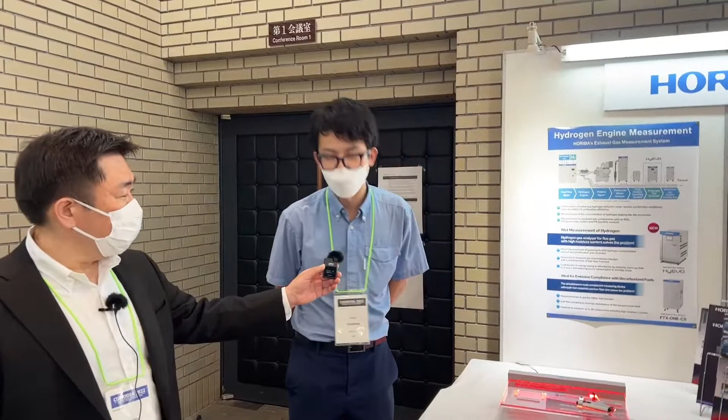Hello everyone, hi everyone. I'm Yoshioka from Horiba Limited. I'm in charge of FTIR measurement systems and hydrogen analyzers. Today I'd like to introduce mainly two topics.

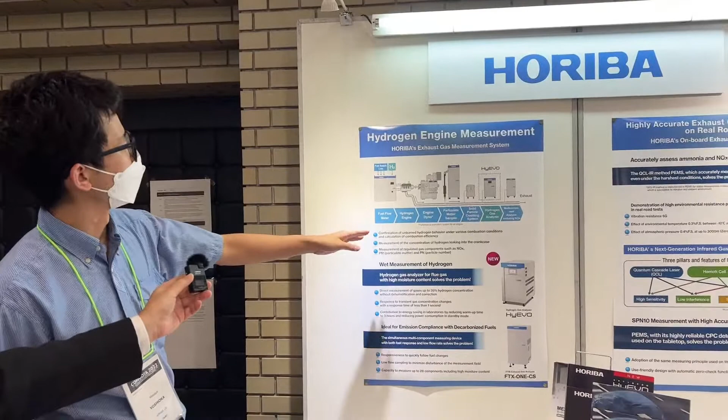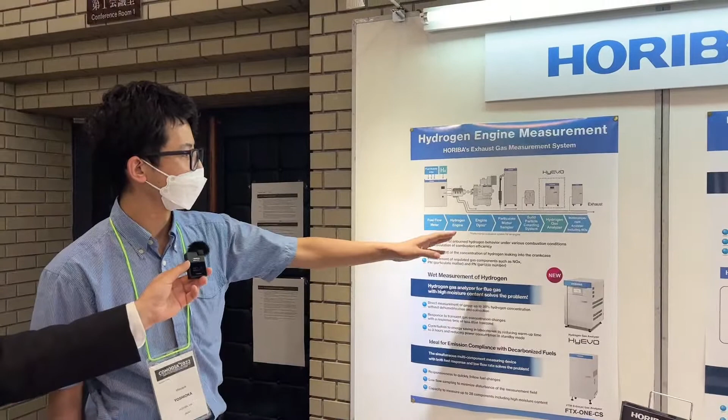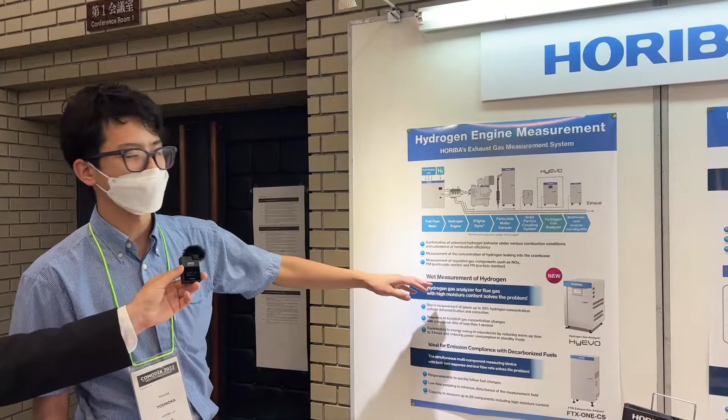One is the hydrogen engine measurement system. Here is a representative schematic. As you know, we need a fuel flow meter, the hydrogen engine itself, and an engine dyno, which measures the performance evaluation of the engine. We also need to measure particulate matter and particle number using these analyzers.

Mostly we need to focus on the hydrogen, so we just released a new hydrogen analyzer called HyEVO. The last one is we also need to measure multi-components including NOx. Today I would like to mainly focus on the new hydrogen analyzer.

This feature is, one, this hydrogen analyzer can measure hydrogen with high moisture content, up to 35% of H2O, due to new technologies. In this case, maximum 35% of water may be contained in the exhaust gas. In such severe conditions, we can measure hydrogen accurately.

The second feature is this HyEVO can measure hydrogen with high response time, less than 1 second, and we achieved that. The last one is we also contribute to saving the laboratory's energy by reducing the warm-up time. The previous one was more than 10 hours, but we reduced the warm-up time to 3 hours in this new system.

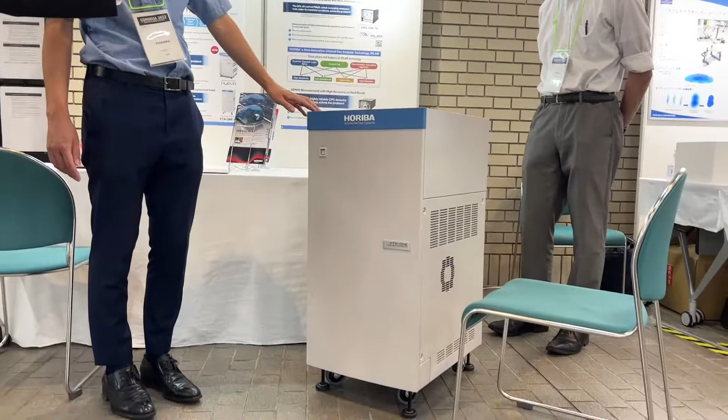The next topic is the FTIR exhaust gas analyzer, which we call FTX-ONE-CS. Here is the real analyzer schematic. We achieved half the size of the previous FTIR, so we can easily move it from one test cell to the next. Here is a feature.

This FTX-ONE can also measure multi-components, up to 28 components, with a high moisture amount, up to 40% water. This can also measure these components with high response time.

We also achieved a very low sample flow rate, 3.5 liters per minute. This contributes to the system especially for very small engine systems, where we need to minimize the disturbance of the measurement field. So this will be one solution, I think.

The next topic is the PEMS system, the on-road system. Thank you very much. So the next presenter is Kitahara-san, who will introduce the PEMS.

My name is Takahiro Kitahara. I'm in charge of the particle measurement system. I will introduce the real driving emission measurement system called PEMS.

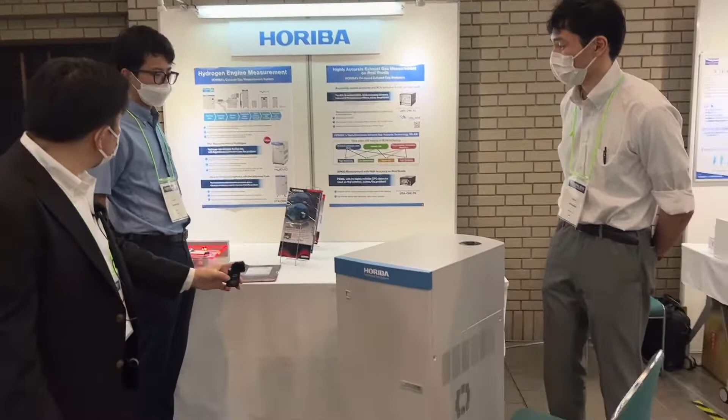I'm very interested in this hydrogen measurement system. What is the size of the measurement system? Is it almost the same? This hydrogen analyzer is very similar to this size. And the FTIR is also a very small one.

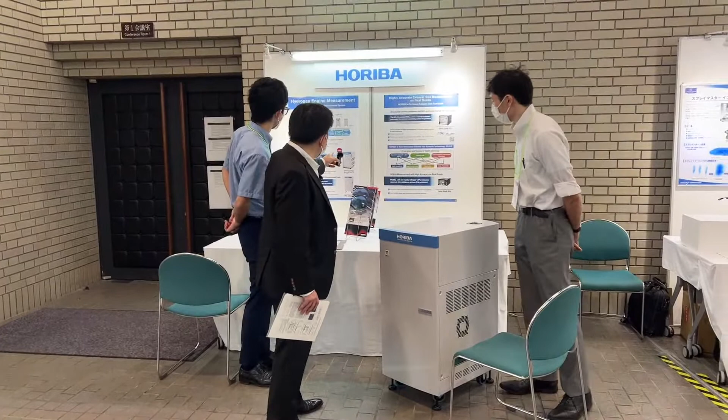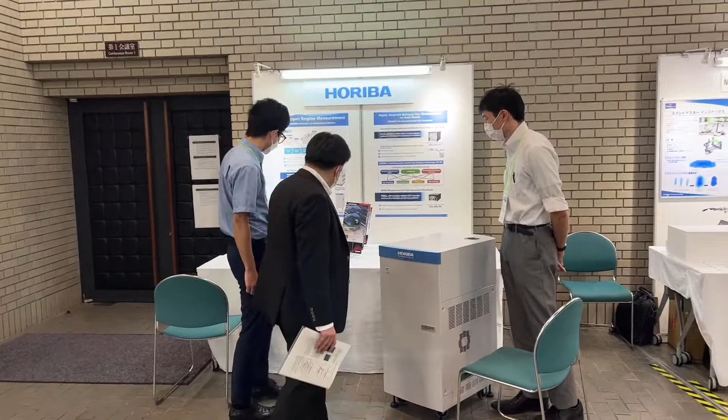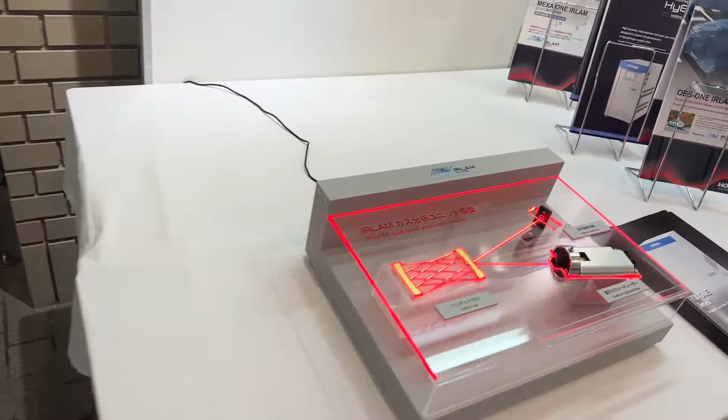Yes, simple schematic. We made this laser by ourselves. You also constructed the QC laser? Yes, by designing the chip things, we can change the wave numbers. Okay, very interesting.

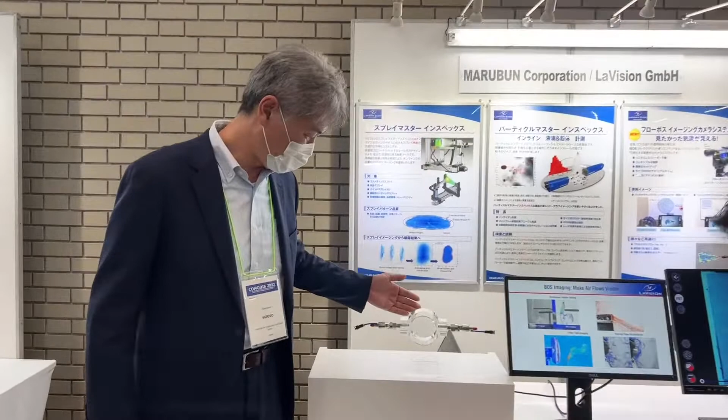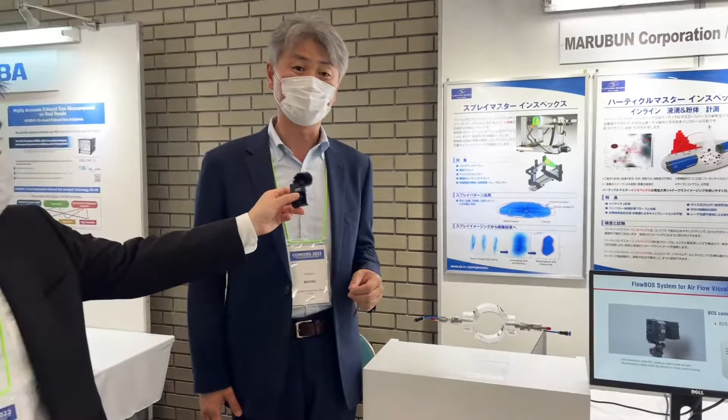This is one system example, for a glass engine cylinder. Laser or light comes in, and it can measure, for example, fuel or temperature or some water, with really high speed measurement, like 32 kilohertz or something. So it's really good for applications measuring fast phenomena.

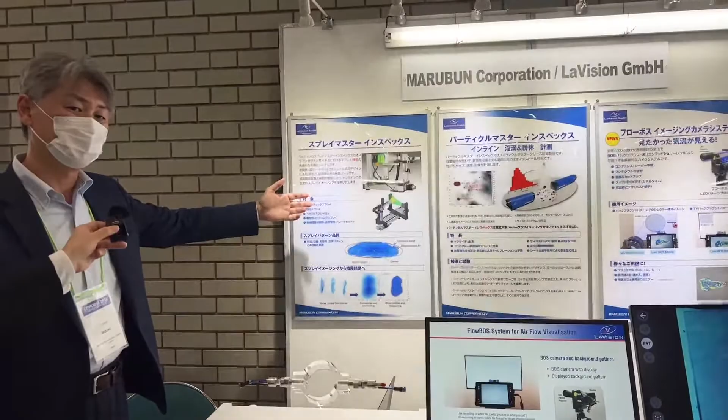Okay, next this slide for the poster is the SprayMaster Inspex system. This is a measurement for spray geometry, so for example, fuel injection or something for quality control - it's also good for this system.

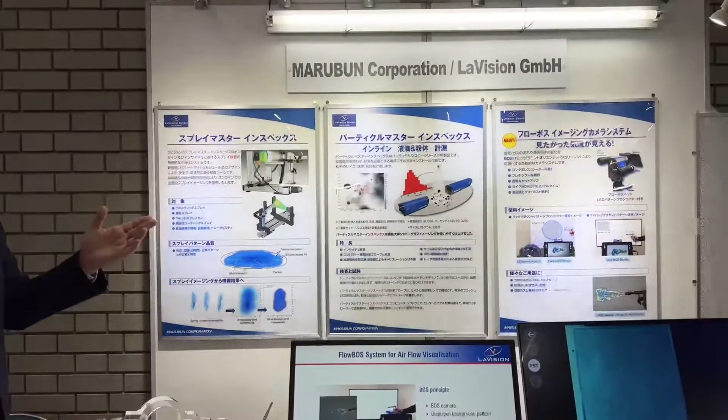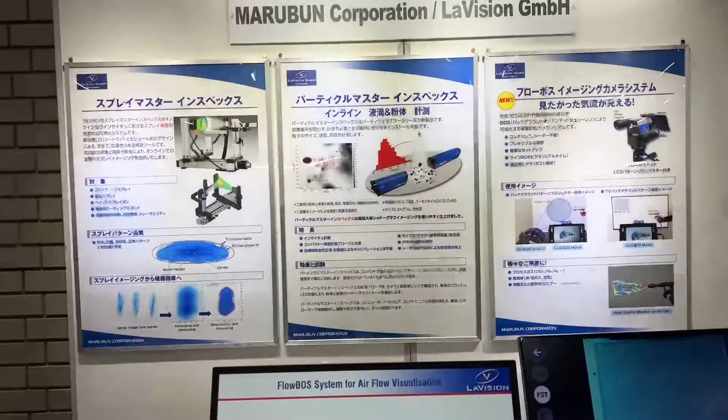And the next one, this is ParticleMaster Inspex, based on the shadowgraphy technique, which can measure the distribution of particle size. This inline system is also available for use in spray dryers or in production areas, so it can cover a huge market range from R&D to production.

Thank you very much, Mizuno-san, for introducing. My name is Thomas Berg, I'm the CEO of LaVision GmbH in Germany. We are located there, and we are developing imaging technology for fluid measurements, and are represented here by Marubun Corporation.

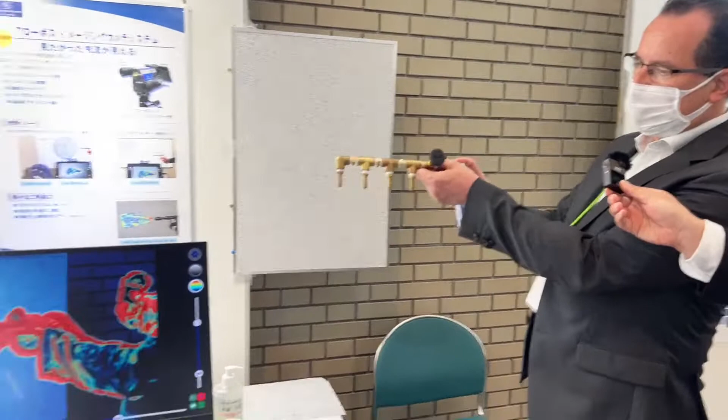I'd like to introduce our latest product, the FlowBOS camera, which is intended to visualize gas flows. This is the camera here, pointing to a background pattern, and if I introduce a gas flow, which I now simulate here, the camera itself can make this gas flow visible. We see different applications in this, especially in the field of hydrogen combustion in the near future, because this way is the only one where you can make hydrogen visible.

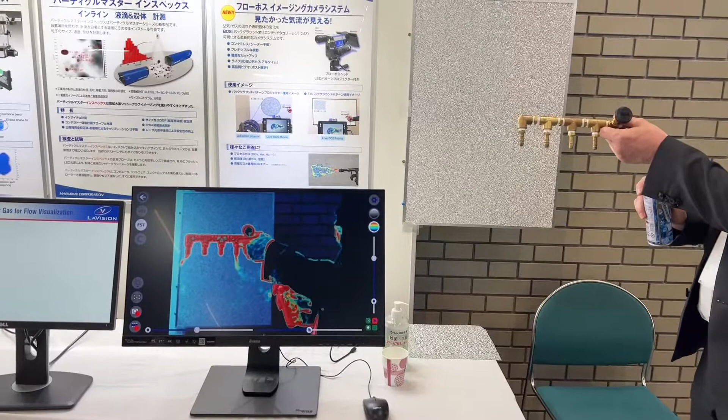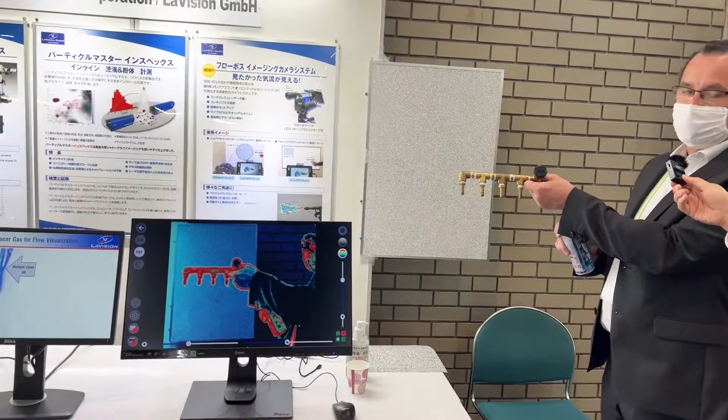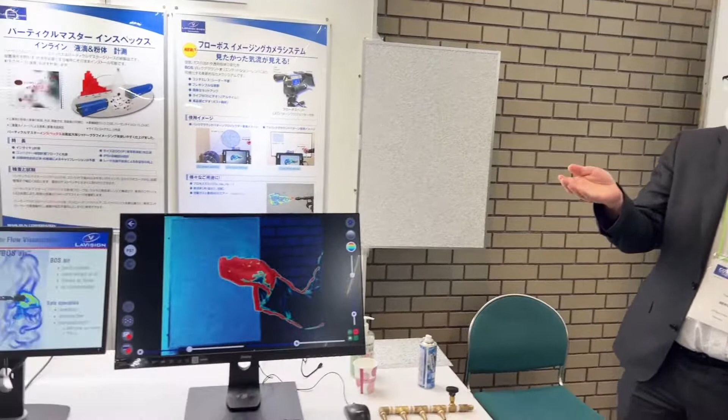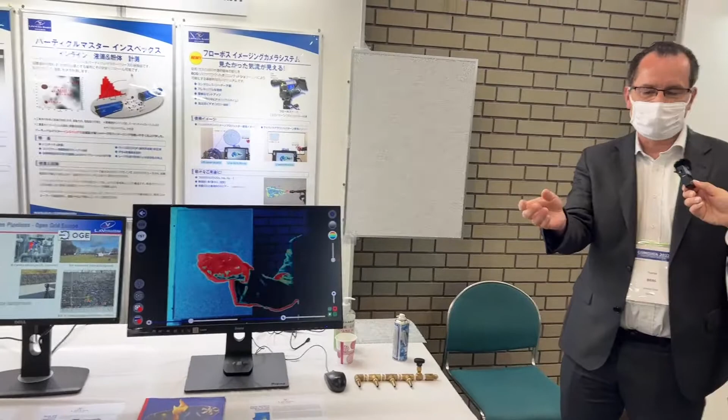Especially distribution of hydrogen, or looking into hydrogen engines or gas turbines, will work like this. The camera itself is very sensitive, so it is also possible to visualize heat - if I hold my hand in here, you still see the heat schlieren from my hand moving up. We use this also for heat transfer phenomena, and there have been research investigations for the spreading of COVID with a mask and so on. So it's a very universal way, and it's easily applicable like a video camera.

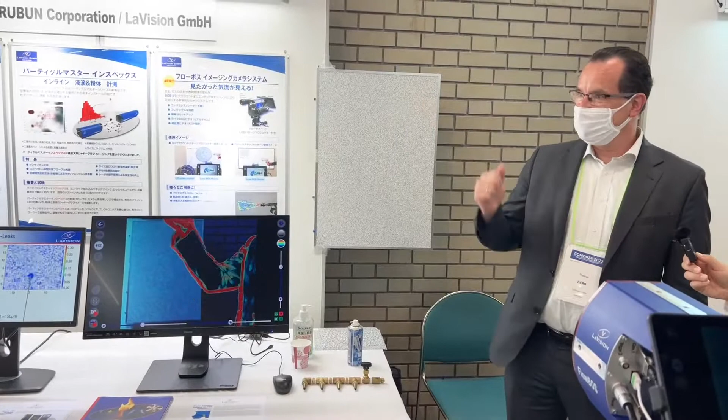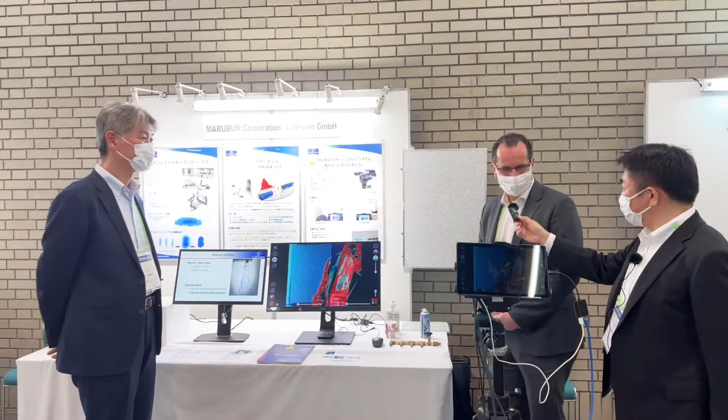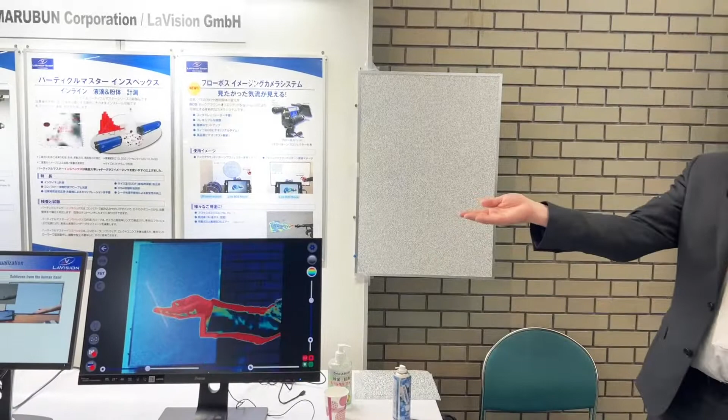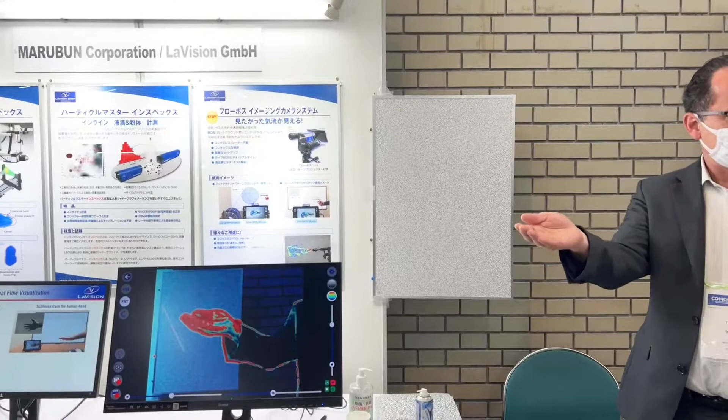It's very interesting, so I have one question. What is the mechanism of the measurement system? This is called background-oriented Schlieren. Schlieren is a measurement technique known with classical mirrors. It's like when you look over a warm street and see the light flickering around - we use this flicker and visualize it from this pattern. The camera looks at this pattern, and if you look over the street you see this motion. If I move my hand like this, your eye does not see anything, but the camera is so sensitive it sees the slightest motion and makes an image out of it. For instance, with hydrogen, the refractive index change of hydrogen is used to visualize it. So this is the technique behind it.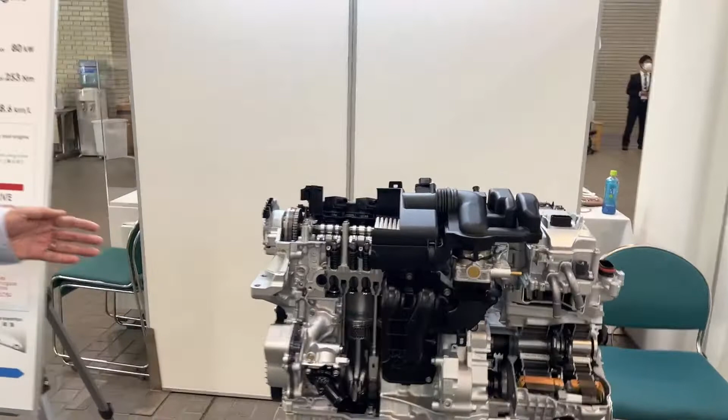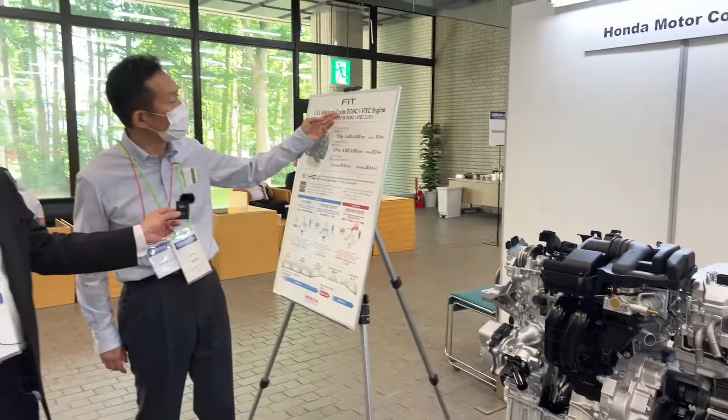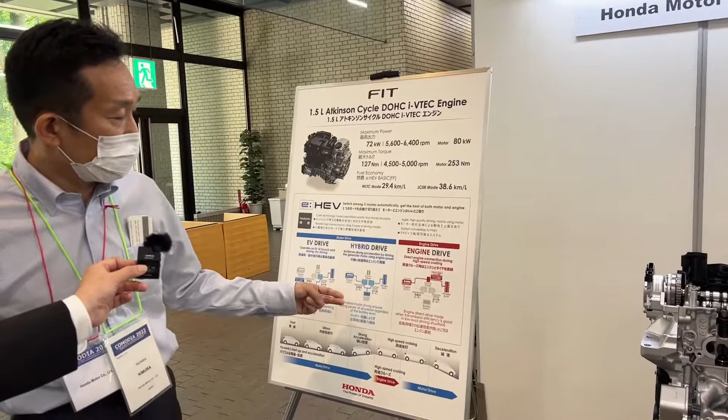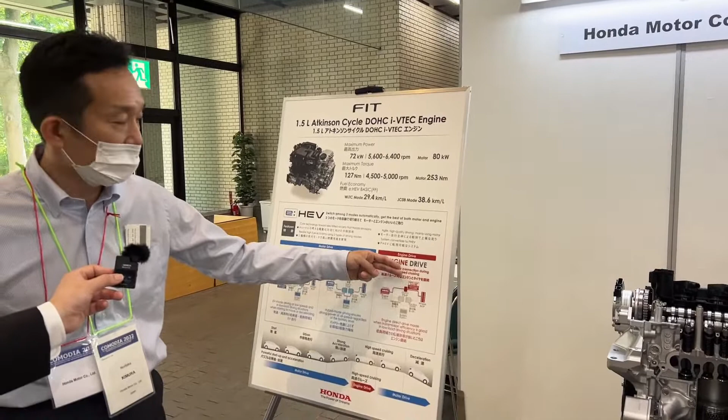I'm going to explain about the Honda e:HEV system. This cutaway model is the Honda e:HEV system, which is installed in global small cars like the Fit in Japan and other countries, the Crider in China, and the Jazz in Europe. This engine is a 1.5 liter Atkinson cycle natural aspiration engine. Maximum power is 72 kilowatts and maximum torque is 127 newton meters. Fuel economy has reached around 30 km per liter. Now let me introduce the e:HEV system. The biggest feature is that it switches between three modes automatically to get the best performance from the engine and motors. First is EV mode, used when starting and at low speeds. Next is hybrid mode, where the engine generates electric power to drive the motors, and the motor produces driving force across the driving area regardless of battery level. The last one is engine drive mode - when driving at high-speed cruising, the engine and tires are directly connected, so you get high transmission efficiency and better fuel consumption. That's all about the Honda e:HEV system.

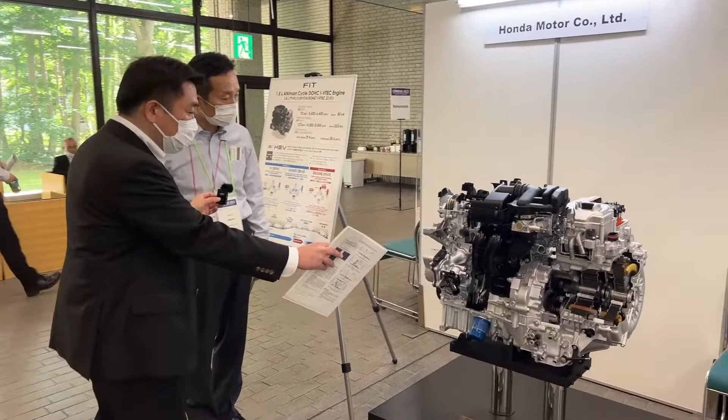Thank you. Okay, thank you very much. I'm very interested in this system - what is the maximum thermal efficiency of this engine? This engine has reached 40.5%. Oh, that's brake thermal efficiency. Yes. Okay, and which one is the electric motor system in this setup? This one. Yes, this one. Okay.